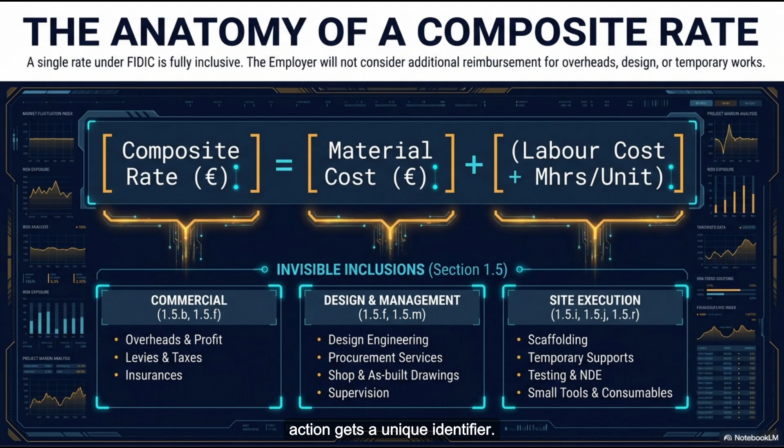Okay, let's unpack this. Because before we can talk about the cost of building, we have to understand how a project is even categorized. Right, the foundation. The contract anchors everything to a 7-level WBS. Now, we see the work breakdown structure all the time in project controls, but the FIDIC preambles seem to dictate a level of granularity that borders on the extreme. It really does. I mean, every single physical object or action gets a unique identifier. Can we walk through the mechanics of how the 7-level structure actually maps the physical site?

Sure. So it functions like a geographical and metallurgical funnel. It starts broad and zooms in with just terrifying precision. Terrifying precision. I like that. So where do we start? Level 0. Level 0 defines the asset itself, say a downstream facility. Then level 1 isolates the area. Okay, so breaking it down geographically. Exactly. So if your code is OR1, you are OBL, meaning outside the battery limit. If it's OR2, you're IBL, inside the battery limit.

Gotcha. So instantly the risk profile is established because working inside the main processing area carries entirely different logistical constraints than just working in a support yard. You hit the nail on the head. Then we hit level 2, which identifies the specific component, like a distinct processing unit or building. Okay. And then level 3. By level 3, we isolate the discipline. So you'd see PA for pipework, ME for mechanical, or IN for instruments.

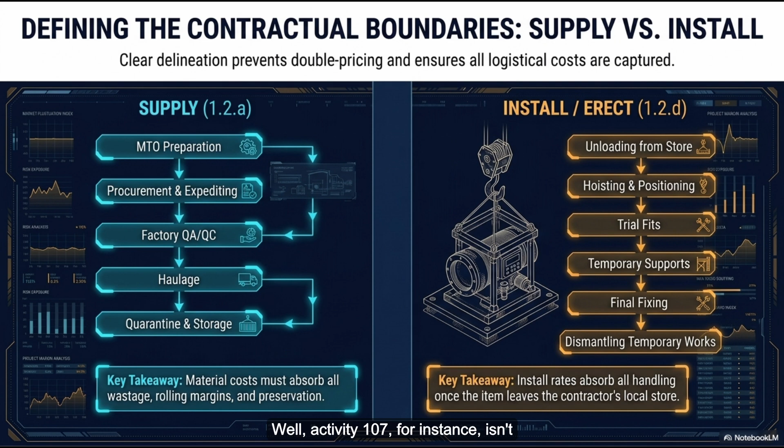That makes sense. But it's level 4 and level 5 where the document stops being a map and starts dictating the actual physical labor. Precisely. Level 4 locks in the exact material or grade. Code P01, for example, dictates carbon steel. P005 is super duplex stainless steel. Wow, okay. And then level 5 tells you the specific activity being performed on that exact material. Give me an example of an activity. Well, Activity 107, for instance, isn't just a generic labor code. It specifies the preparation, cutting, and beveling of a pipe at a fabrication shop. Which brings us to the final 2, level 6 and level 7.

Right. Level 6 provides the description, and level 7 dictates the item size. So a completed code might end in 120 for a Schedule 120 thickness and 018 for a 14-inch diameter pipe. Exactly. That full 7-level code tells you everything about that one piece of work.

Okay, I have to jump in here and push back on this a bit, because as I was reading this, I just kept thinking, if I am the prime contractor, doesn't managing tens of thousands of these 7-level alphanumeric codes create an absolute administrative nightmare? It definitely seems like it. Right. Why not just bill the client for installing the cooling water pipe system? Why do we need a unique barcode for the act of beveling a 14-inch carbon steel pipe inside the battery limit? It looks like administrative overkill until the moment something inevitably goes wrong or changes.

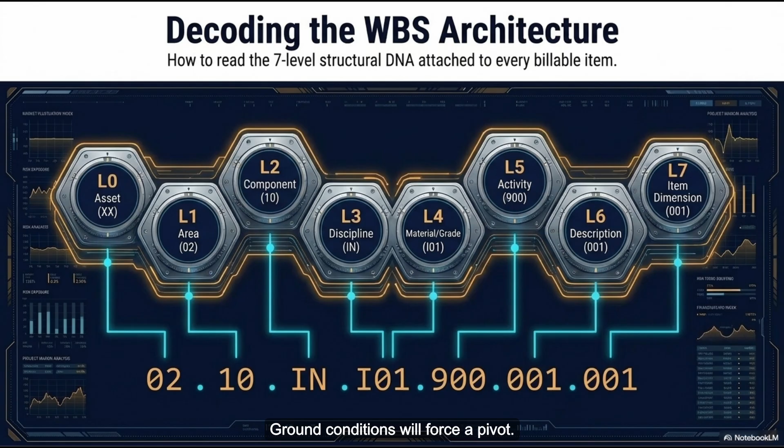Changes. Exactly. If we connect this to the bigger picture, this level of granularity is the ultimate safety net for both the employer and the contractor when dealing with change orders. Because things always change on a mega project. Always. On a multi-billion-dollar build, the design will change. Ground conditions will force a pivot. If you only bill for installing the cooling system and the employer decides to move a pump station 50 feet to the left, how do you value that change? I see. It becomes a massive project-killing legal dispute. Exactly. Without the matrix, a change order is just two executives screaming at each other over a boardroom table. Right, which nobody wants. That's the historical alternative.

But the preambles explicitly state that if a new item is added to the scope of work, its financial rate must be calculated from a similar, analogous item already priced within this 7-level WBS system. Okay, so if the employer says, hey, we actually need this run of pipe to be 16 inches instead of 14 inches, the contractor can't just opportunistically invent a wildly inflated new price. No, they cannot. They are forced to look at the WBS, find the labor and material rates for the closest analogous 14-inch item, and mathematically derive the new price based on pre-agreed metrics. Wow. So the code neutralizes the emotion. It prevents chaos.

So the WBS perfectly identifies the object. It essentially assigns a hyper-specific barcode to every single physical action on the site. That's a good way to look at it. But a barcode doesn't protect a budget if the price tag attached to it keeps fluctuating based on reality. How does this contract lock down the actual financial cost of that barcode? That brings us to Section 1 of the preambles, and specifically the mechanism of the composite rate. Yes. It's often summarized by two of the most heavily loaded words in the entire construction industry, supply and install.

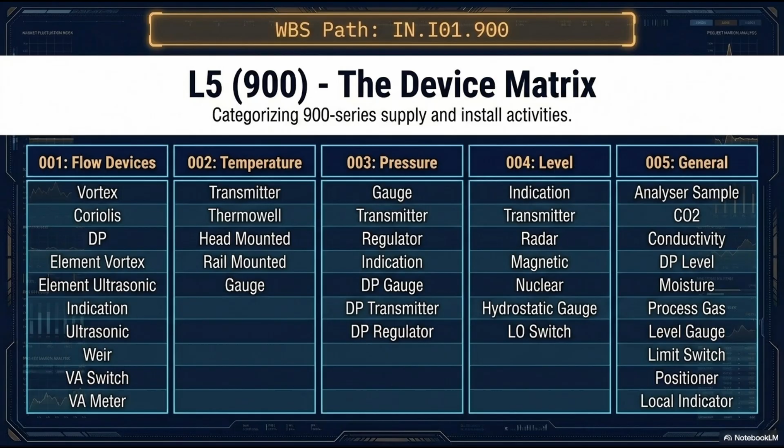I kept thinking of it like booking an all-inclusive resort package. If I hire you to supply and install a door at my facility under this contract, you can't come back to me later and charge a separate invoice for the screwdriver you used. Yep. You can't charge me for the diesel it took to drive to the site. You definitely can't charge me for the broom you used to sweep up your own sawdust.

It is all internalized in that one composite number. That is exactly the intended mechanism. The preambles state that quantities, rates, and prices are fully inclusive regardless of, and I'll quote the text directly here, difficulty, location, complexity, and whatever method the contractor may adopt.

Wait, forcing a contractor to eat the cost of bad weather or, like, a welder having a slow day seems incredibly one-sided. It is very strict. If I have to rebuild a massive scaffolding structure 3 times because of high winds, or if my laser-guided robot breaks and I have to use a guy with a handsaw, the rate is the rate. The employer doesn't pay a cent more.

So how does anyone actually make a profit under this red book? Well, that is the multi-million-dollar question. The answer is that contractors operating at this tier have to be elite estimators. They really have to know their stuff. Yes. They build risk premiums into their bids. They use historical data to predict exactly how many days they will lose to wind or how many welds will fail X-ray and need to be redone. So they're playing the odds.

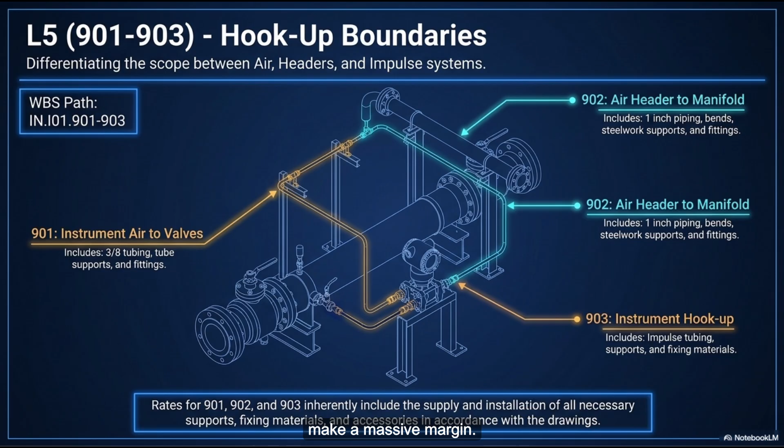In a way. The employer is buying a finished product in place, transferring the risk of execution entirely onto the shoulders of the contractor. If the contractor is more efficient than their estimate, they make a massive margin. And if they aren't? If they are sloppy, they absorb the bleed.

Man. Okay, so I tried wrapping my head around the measurement section next, and honestly, the logic seems wildly inconsistent across different trades. It can definitely look that way. Like, steel gets measured by weight, but piping completely ignores weight and just uses a tape measure down the center. Why the discrepancy? Well, here's where it gets really interesting, because the contract dictates totally different physical realities for different disciplines. That's right. Each discipline has its own unique set of preambles tailored to how that material behaves and how it is fabricated. So let's look at structural steelwork first.

Okay, so steelwork is measured in net tons. The contract even forces a standardized density to use if a specific weight isn't available, 7,850 kilograms per cubic meter. Right. But the contractor faces immediate margin squeezes here. For instance, they get no allowance for rolling margins. Okay, let's explain that, because for the listener, that's huge.

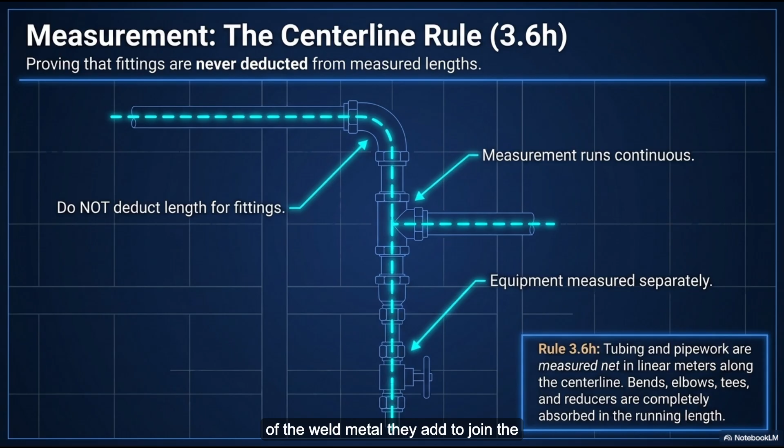Right. When a steel mill rolls an I-beam, they have a manufacturing tolerance. The beam might actually be, say, 2% heavier than the theoretical weight in the manual. The contractor has to buy that physical heavy beam from the mill, but they only get paid by the employer for the theoretical weight. They buy heavy, but bill theoretical. Exactly. They also get no allowance for the weight of the weld metal they add to join the beams and no allowance for waste disposal. Just absorbing more and more cost.

Yep. But the rule regarding voids is where the labor calculation really comes into play. If you cut a hole in a steel plate to let a pipe pass through, you do not deduct that empty space from the measurement unless the hole is larger than 0.10 square meters. At first, I thought, why would the employer pay for steel that isn't there? But it's about the labor, right?

Exactly. Cutting a tiny, precise hole in a thick steel plate takes significantly more man-hours than just leaving the plate solid. So the contractor gets to keep the square meter rate of the missing steel to offset the intense labor of cutting the void. It's a pragmatic compromise. Now, contrast that with pipework. Right. Piping is totally different.

Yes, piping is not measured by weight. It's measured in linear meters along the center line. It goes right through all the elbows and T's. But not through inline equipment. I noticed the text specifically states you measure the pipe up to the flange of a valve, but you stop. You don't measure through the valve. Correct. Because the valve itself is a totally separate WBS item.

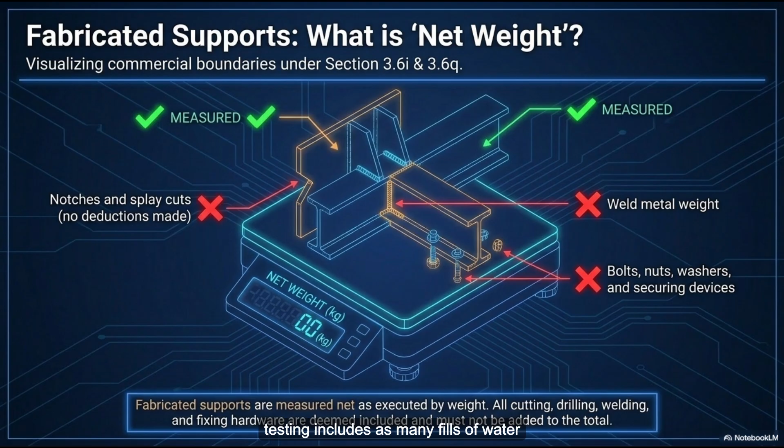Exactly. And the testing requirements in the pipework preambles are famously stringent. Oh, the hydro testing. Yes. When you complete a pipe system, you have to hydro test it. You pump it full of high-pressure water to prove it doesn't leak. The preamble dictates the rate for this testing includes as many fills of water or air as are required. Wait. As many fills as required. That is brutal. It really is.

I mean, you test it, it leaks, you drain thousands of gallons of water, grind out the bad weld, re-weld it, and refill the entire system. Yep. And you don't get a dime for the second fill. Or the third. You just bleed man-hours until it passes, all under that original composite rate. It forces a culture of do it right the first time.

Clearly. What about civil and earthworks? If we look at civil and earthworks, the act of carving out the foundations for this sprawling facility, the transfer of risk is just as heavy. The excavation rates per cubic meter must include the cost of upholding the sides of the trench with shoring so it doesn't collapse. Makes sense. It also forces the contractor to absorb the bulking and shrinkage of the soil.

Because when you dig compacted dirt out of the ground, it expands, it bulks. You have to pay trucks to haul away a larger volume than the hole you dug. Exactly. And when you pack dirt back in, it shrinks, requiring more material to fill the same space. So the contractor has to accurately forecast the geotechnical properties of the site's dirt before they ever put a shovel in the ground. Right. They have to know exactly what they're digging into.

Oh, and the dead services rule. I have to mention this. If you're excavating and you hit a 50-year-old abandoned concrete pipe, under normal circumstances, you'd halt work and issue a variation, right? Normally, yes. But under these preambles, the rate explicitly says removing dead services is already included in your price per cubic meter. You just have to rip it out and keep moving. It forces the contractor to conduct exhaustive site surveys before bidding.

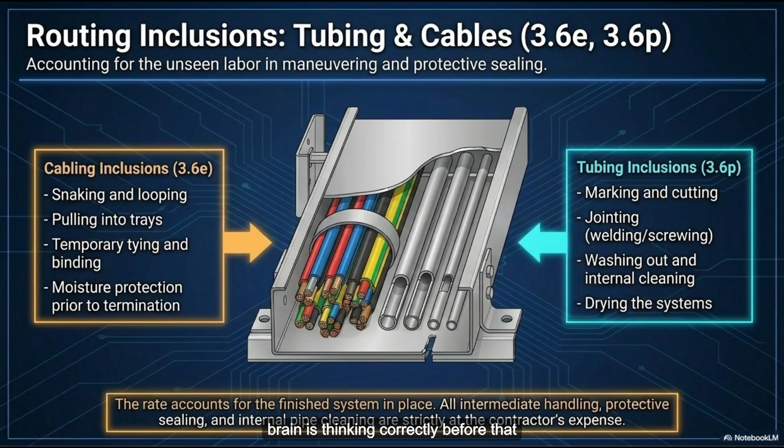This raises an important question regarding the physical architecture. You have all these brilliant, sensitive sensors mounted all over the facility. How do you physically integrate them into the control systems? That's the 901, 902, and 903 series in the WBS. The hookups. Right. 901 covers instrument air to valves. 902 is instrument air header to manifold. 903 is instrument impulse tubing.

And they don't just let you charge a generic rate for tubing, do they? No, they don't. The schedule forces the contractor to price specific runs: a 5-meter run of 3/8-inch tubing, a 10-meter run, a 15-meter run. You have to pre-calculate the exact geometry of the hookup. That is wild. The electrical cabling is even more intense.

The text dictates that the length measured for payment is the actual installed pulled length. Which means the straight line from switchgear A to junction box B. Right. But if you pull that cable, you need extra length to snake it around corners in the tray. You need tails, the extra meter of wire left inside the massive switchgear cabinet so the electrician can actually strip it and make the termination. Exactly. The cost of all that extra wire, the snaking and the tails, must be absorbed by the contractor into the rate of the straight pulled length.

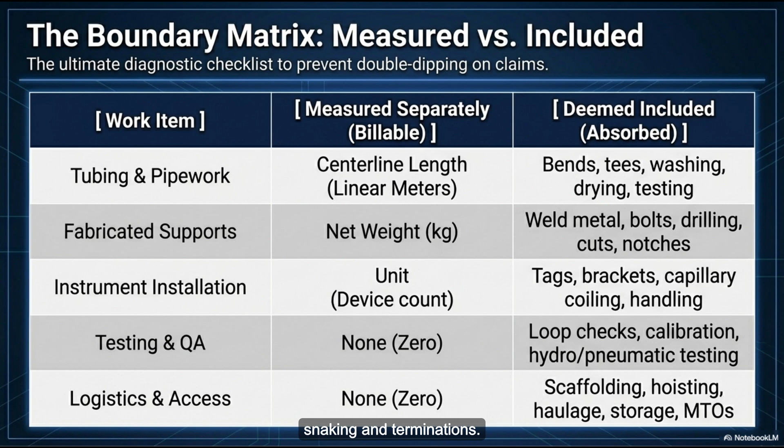Exactly. If the structural straight line distance is 100 meters, but the electrical foreman knows he needs 115 meters of cable to account for tray drops, snaking, and terminations, the contractor only gets paid for 100 meters. Wow. The estimator has to forecast the internal layout of a cabinet months in advance to build the cost of those extra 15 meters of copper into the linear meter rate.

So what does this all mean? When I step back and look at this entire matrix, the 7-level WBS, the composite rates, the absorbed rolling margins, the hidden scaffolding, the pulled length versus actual length, these documents essentially force the contractor to foresee the future. That is the ultimate takeaway. It forces foresight. I mean, they have to predict the weather.

They have to predict exactly how many man-hours a worker will spend calibrating a single Vortex flow transmitter in the middle of a dusty site. They have to capture the messy, unpredictable, chaotic reality of human labor and physical forces and compress it all into a guaranteed fixed decimal point.

And that is why understanding these preambles is so vital for anyone involved in major capital projects. It gives you the operational framework for how massive infrastructure comes to exist. It takes away all the excuses. It really does. It removes the emotion, the excuses, and the variables, leaving only the mechanism of risk and reward. It shows you exactly how human effort is translated into contractual reality.

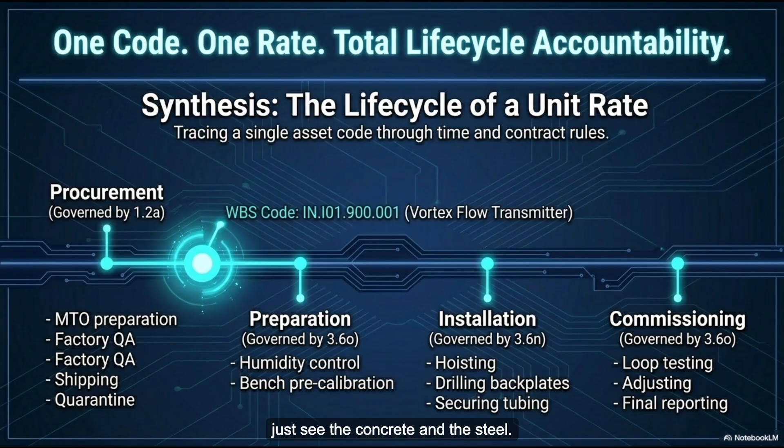As we wrap up this deep dive, I want to leave you, the listener, with a new lens. The next time you drive past a towering bridge or a sprawling power plant, don't just see the concrete and the steel. Look a little closer. Exactly. I want you to see the matrix. Visualize those 7-level WBS codes floating over the pipes.

Realize that every single action, down to the painter's scaffolding, the cleanup of the sawdust, and the X-ray of the hidden weld, it was all pre-calculated. Yes. It was assigned a composite rate long before the first shovel ever broke the earth. Every successful megastructure is a quiet triumph of estimation and risk management. It truly is. Yeah. But looking at how mathematical and stringent this system is leaves me with a final, somewhat provocative thought to mull over.

Oh, what's that? Well, if we've successfully managed to distill the chaotic, messy reality of human labor, weather, and physical construction into an airtight, 7-level alphanumeric code, a system so perfectly logical and rule-bound, how long is it until artificial intelligence takes this FIDWBS system and simply bypasses humans altogether to automatically bid, design, and manage the mega projects of the future? Is human estimation already obsolete?

Now that is a thought that will keep you up at night. The paper architecture might soon be estimating itself. Something to ponder next time you see a crane on the skyline.